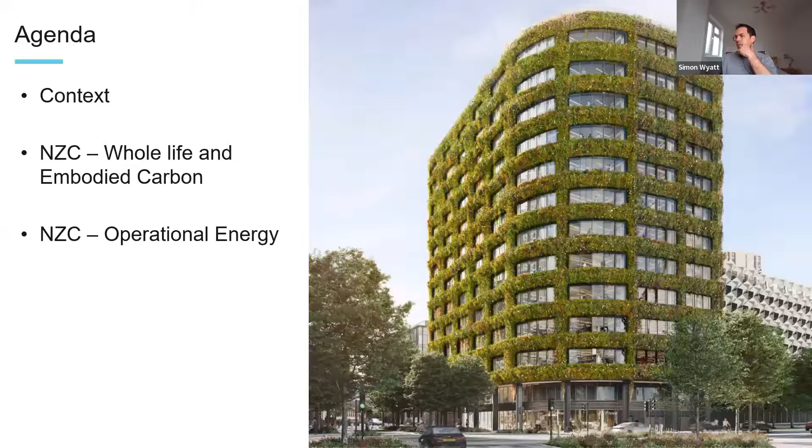So last year, we saw COP26 in Glasgow, where the world governments came together to review their targets. Obviously, after Paris, which was 6 years earlier in 2015, where the governments agreed to limit climate change to 2 degrees with an aspiration of reducing it to 1.5 degrees. Unfortunately, before the agreement, commitments were only around about 3 degrees. We saw some movement during COP26.

We saw commitments potentially going down as low as 2.1 degrees, but only policies and actions equating to roughly 2.7 degrees. So people are making a lot of commitments and noises, but they're not backing it up with full policy and action. So there's still quite a policy gap, which all global governments are looking at the moment to see if they can move us down towards that 2 degrees and then hopefully on towards 1.5 degrees.

So COP26 was aspirational, but didn't deliver as much as we hoped. And there's still a significant amount of work to do. And when they meet again later this year in Egypt, I believe, there's significantly more work to do in order to get down towards the targets we're looking at.

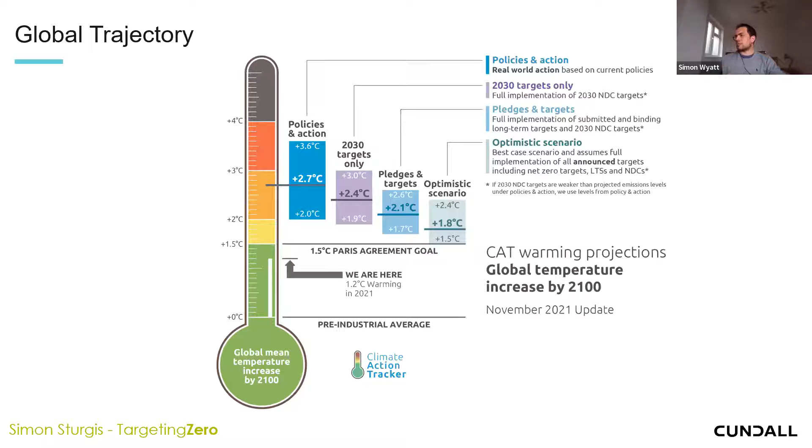What does this mean? Well, it means that we're still on a trajectory for well above 2 degrees, with a significant emissions gap down to 1.5 degrees globally. We need to take urgent action in order to meet that. The IPCC report, which came out a couple of months ago, was pretty damning, indicating that we need to take drastic action urgently to mitigate the worst effects of climate change going forward. And we need to take that action in the next 2 to 3 years in order to alleviate the worst effects.

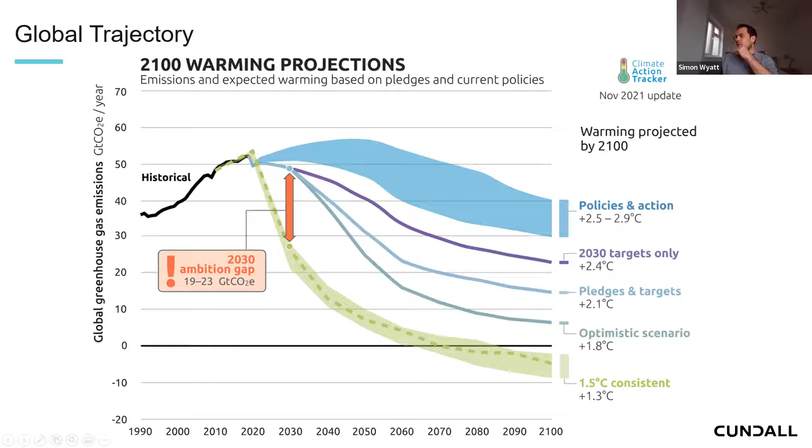What's the UK government doing? Well, the UK government is actually doing reasonably well in terms of commitments, but again, they're lacking policy and focus to deliver those commitments. So back in 2019, they amended the Climate Change Act to be net zero carbon by 2050, which was originally a target of 80% reduction. Now it's down to zero, which means there's no places to hide.

All industries need to decarbonise, both new buildings and existing buildings, and all other sectors of the economy need to move down to net zero carbon by 2050. This is a legally binding target and is fairly aspirational. The UK government was one of the first to do this.

Since then, they've actually brought in some interim targets, because it's not just good enough to be net zero carbon by 2050. If we only achieve it towards the end of the 2040s, we will have spent our carbon budget and be over 2 degrees. We need significant reductions, as I said earlier, before that.

So the UK government has tried to align their emission trajectory to a 1.5 degree trajectory. They're not quite there yet, but they're looking at 78% reduction by 2035 and a 68% reduction by 2030, which is what they committed to at COP. These are closely aligned to 1.5 degrees, but not fully aligned. I think there's only one country in the world which is fully aligned at the moment with the 1.5 degree trajectory. There's a dozen or so countries, including the UK, which are considered to be near, but not fully aligned.

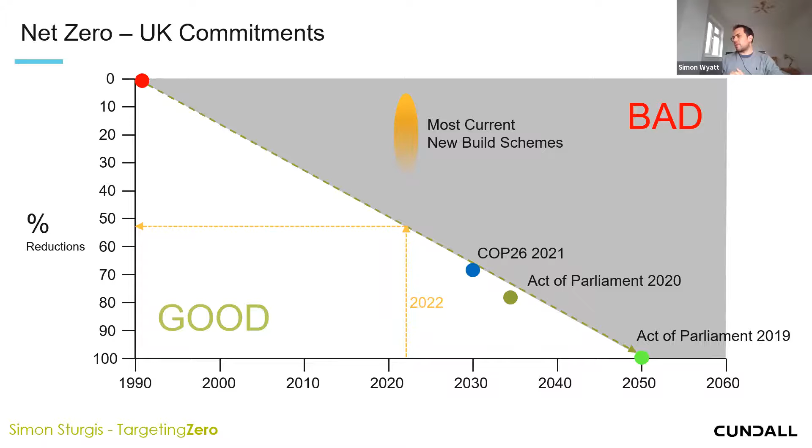Most new schemes built to regulations and standards are only achieving a 20 to 30% reduction over the 1990 baseline level. So we need significant action on new build, and we need significant action on retrofit and refurbishment as we go forward. And retrofit and refurbishment will become much more important in order to meet those targets as embodied carbon drives up the agenda.

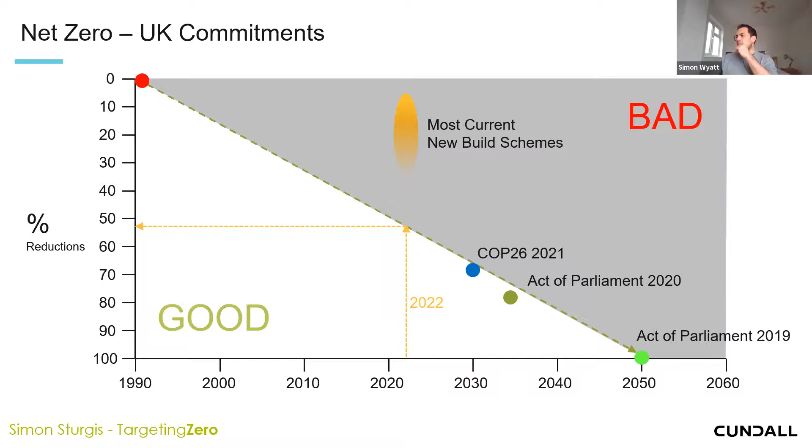So just taking a step back, what do we actually need to look at, and what do we actually report? When we're looking at carbon footprinting, we basically have to follow a standard process on an annual basis, which is calculating the carbon footprint, reducing that footprint, and if there's any emissions left, offsetting it. And what's really important is reporting that transparently so that everyone can see that everyone is doing it to the same standard and processes. Seems like a fairly straightforward process, but carbon emissions are a lot more complicated than that.

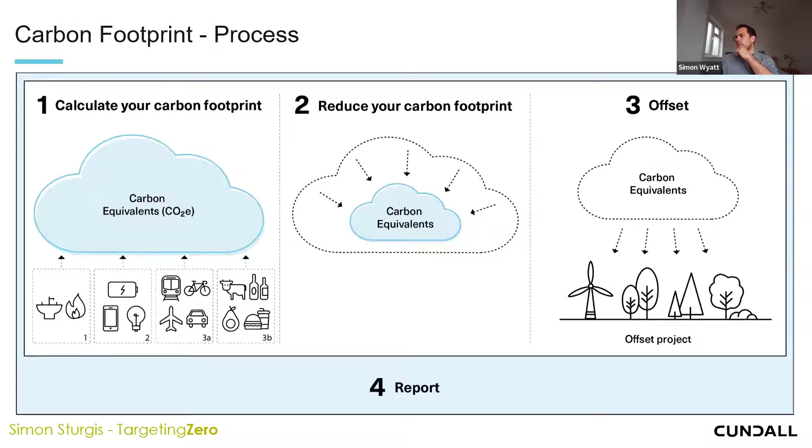When we talk about carbon emissions, we generally want to refer to the greenhouse gas protocols. The greenhouse gas protocols define all carbon emissions, all greenhouse gas emissions globally. They don't just cover carbon, they cover all greenhouse gases, and they're broken into 3 scopes. Scope 1 emissions are where you directly burn fossil fuels. So that's things like gas boilers in buildings, also vehicles and fleets of vehicles that are part of a business. Scope 2 emissions are indirect use of fossil fuels such as electricity, district heating, district cooling.

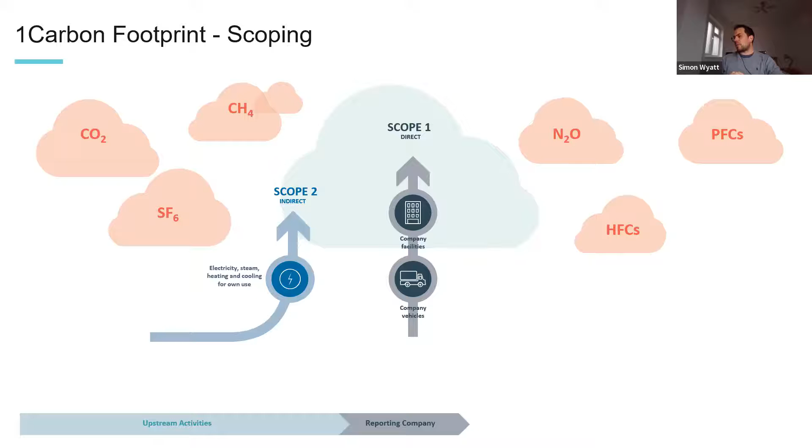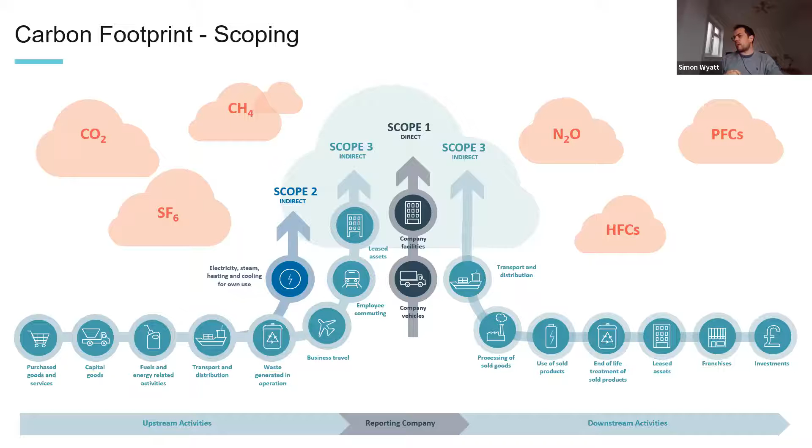Both of these can be fairly accurately reported and have been done for a number of years. You just take your gas and electricity bill, quantities of diesel, petrol invoices. As a company, those are fairly easy to report, and at building level, it's normally just your gas and electricity bill. But carbon emissions don't just stop there. We also have what are known as scope 3 emissions, which are indirect emissions, both up and downstream, which cover basically everything we touch that has a carbon footprint. So business travel, commuting, all goods and services we purchase, any transaction you do will have a carbon footprint, and that should be accounted for at corporate level.

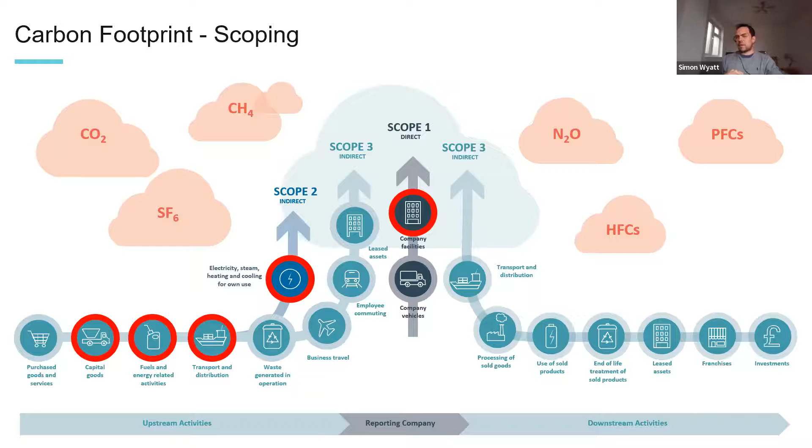When we look at buildings, we generally try and simplify this process. We very much focus on the scope 1 and 2 emissions, but we also look at scope 3 in terms of capital goods, so the materials we use to build buildings, transportation of materials to site, and also fuel and energy related activities. And a number of years ago, what we did in the built environment, and Simon was heavily involved in this, was to create something called the life cycle modules, which simplify all scope emissions for the built environment with a focus around scope 3 embodied carbon and whole life carbon. So I'll hand over to Simon now, who's going to take you through the definition of the life cycle modules and go in a bit more detail on embodied carbon and whole life carbon.

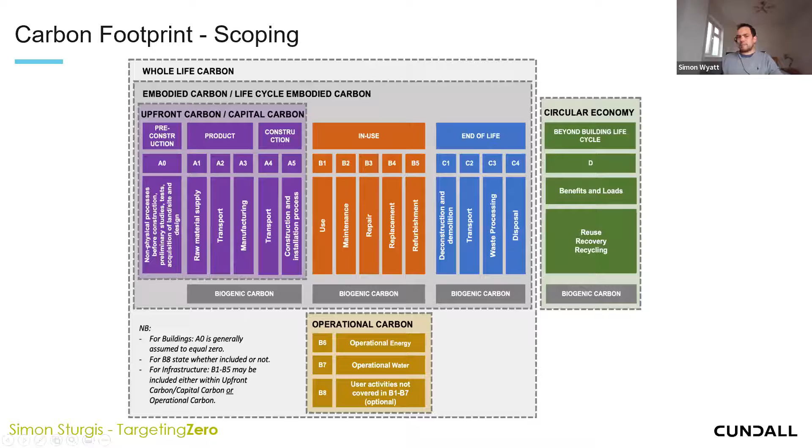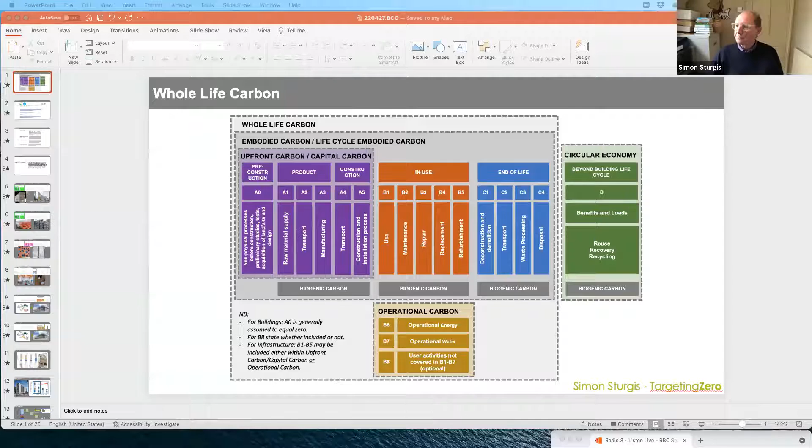Simon, you need to come out of the... Sorry, there you go. Okay, so yeah, we can see that now, Simon. Great. I hope that looks okay.

So thank you, Simon. So it's a bit of a double Simon like this. What I'm going to try and explain, without getting too complicated, is the structure of whole life carbon assessments. And you'll see in the different colors there, it's broken down into, in purple, you've got module A, which is about product sourcing principally and construction. Then in orange, you've got module B, which is to do with materials in use, emissions, maintenance, repair, replacement, and so on.

And below that, also obviously in use, is operational energy, operational water. And below that is user activities not covered by B1 to B7. So you've got the in use in the middle there, and then the end of life, which is demolition or deconstruction preferably. And all of those together, as you can see in the outer dotted box, represent whole life carbon. So all of that would be described as a whole life carbon assessment. So it's both operational emissions and embodied emissions from the material use.

And if you look at this smaller box, the second size box, if you like, which is embodied carbon or life cycle embodied carbon, everything in there, which is material orientated, is what is described as embodied carbon. So it includes not just the upfront carbon, which is the initial carbon expenditure from product sourcing and fabrication and so on, and construction, but also it includes in use and end of life. So that gives you your total embodied carbon over the life of a building.

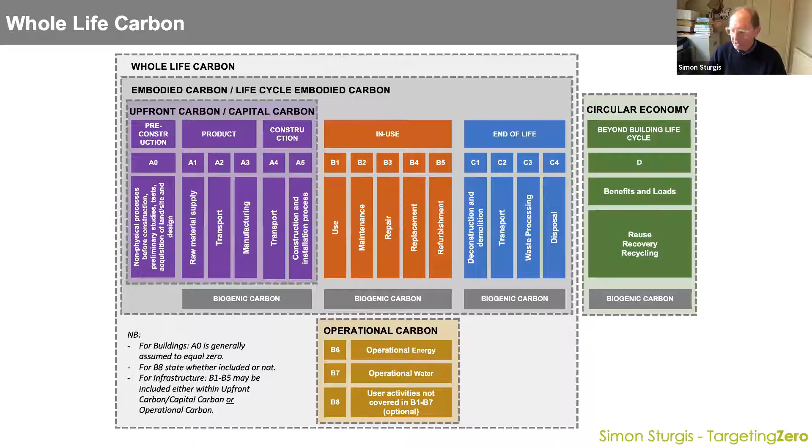And the other thing that's worth noting is that each of the maintenance, repair, replacement modules are effectively a mini version of the whole. So when you, for example, replace a cladding system or something, you're really doing the same thing as a new building, but in microcosm. So I'll just go on to something a bit more about definitions.

So this document that Simon mentioned is something that's been worked on by a cross-industry group. And you'll see at the moment there, it's just got Whole Life Carbon Network, LETI and RIBA, but we are just about to add in CIBSE, RICS, IStructE, UKGBC, and ICE, subject to approvals by their professional institutions. And what we're trying to do here is produce a consistent set of definitions for cross-industry use. An early version of this was produced and is available on the LETI website from last May. But this is being updated. And I'm just going to show you a couple of things.

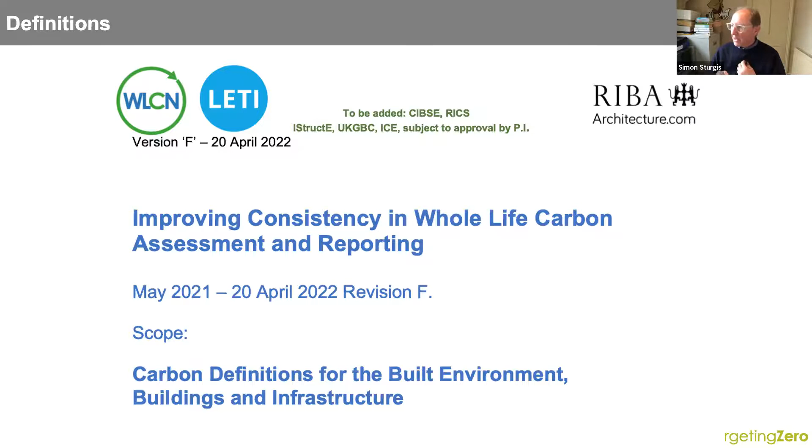And the reason for this is that a lot of different organizations produce their own definitions, which are all slightly conflicted. So what this is trying to do is produce a consistent set of definitions that align with that structure that I've just shown you in all the different colors. So, for example, whole life carbon, I won't go through these in detail, but it's describing what whole life carbon is.

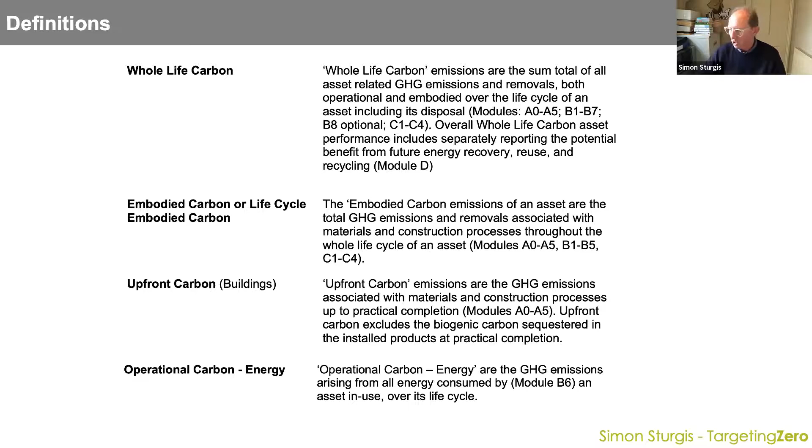And basically it's saying it's all of those modules as I've described. And then you've got embodied carbon, upfront carbon, which is the early stage, and then operational carbon, which Simon will talk about later. And then I think most importantly is net zero. So typically net zero has been thought of as reducing your in-use, your operational emissions down to zero. Well, in reality, what we're now saying is that net zero is everything, because it is then consistent with science-based targets, and it's consistent with the overall trajectory that Simon was talking about.

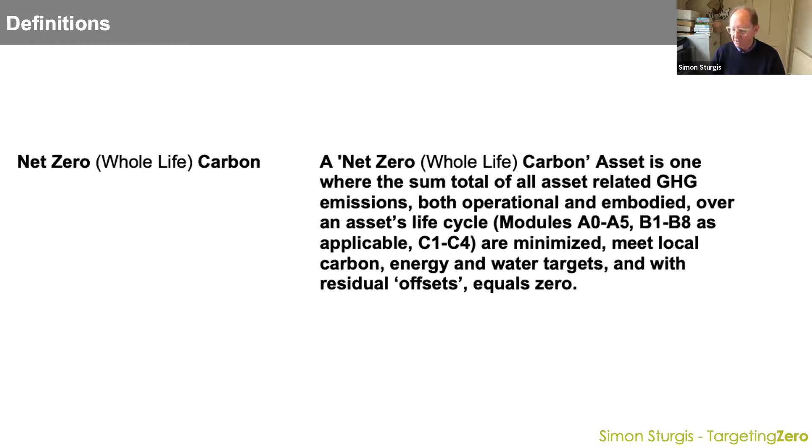So I'll just take you through each of these stages, just to give you a quick snapshot of the ways you might reduce. So these first stages, as I said, are the product and construction stage, module A. And on the left there, you've got a cross-section through the new Google headquarters under construction next to King's Cross. And what this is doing is reducing its carbon footprint by introducing things like intermediate timber floors and then timber cladding on the outside as well. And despite all of that, which you might think, well, what about the life expectancy and so on? But they're looking at least 100-year life cycle.

The building on the right, some of you might notice, is Triton Square. Number one, I think, is Triton Square in London. And that is actually a retrofit. So what has happened there is that the existing frame has been retained and various other elements have been retained, but it is fundamentally a retrofit in practice, but it feels and looks and operates like a new building. So that, of course, has a much lower footprint. Both of those are different ways of lowering your footprint.

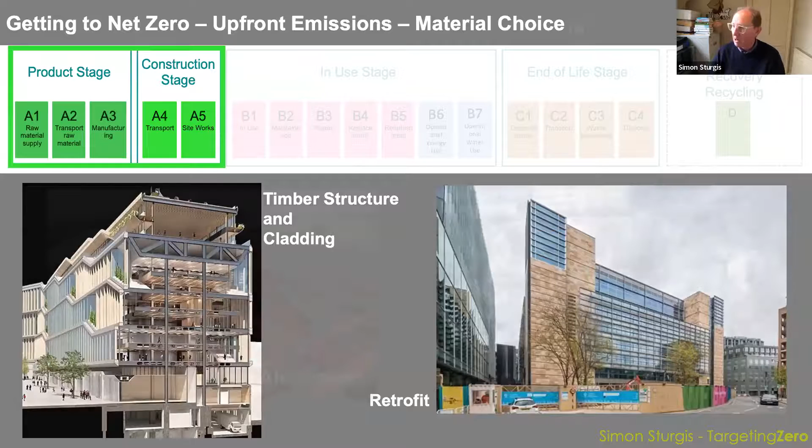Also important is something like, and I'm using aluminium as an example here, and this is not a hard and fast rule, but as a general principle, if you're using, say, anodizing, you need a consistent substrate of aluminium, which means you need new aluminium to ensure the color is consistent across your entire facade. Whereas if you use recycled aluminium, then you're going to need powder coating. So in other words, if you choose powder coating rather than anodizing, you're able to use recycled material. There are other issues, for example, like life expectancy and so on, to take into consideration.

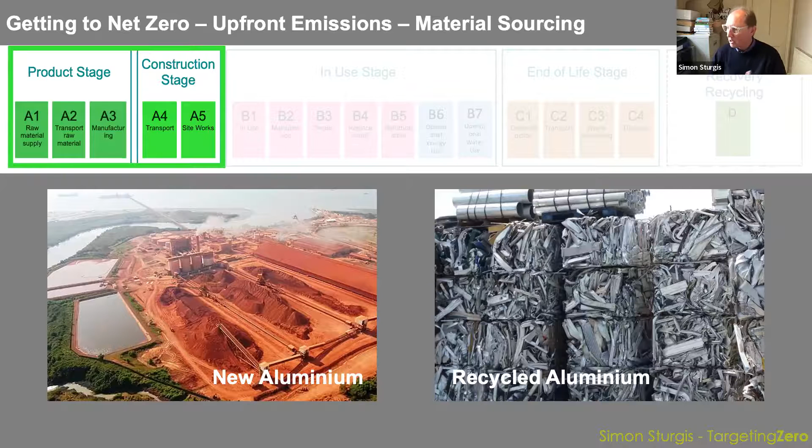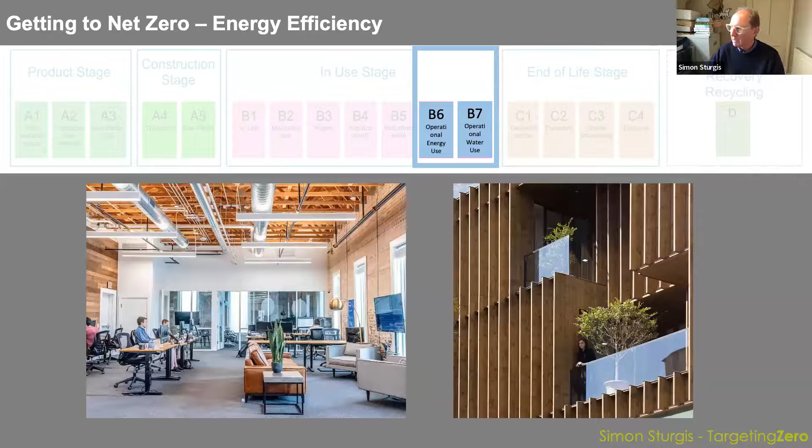So in use operational energy and water, this is really just making the point that obviously you can manage the amount of energy you use within a building by how you design the facade on the right there, and obviously how you deal with the temperature and so on inside, humidity and what have you, can all be managed by fabric, if you like, a fabric first type of approach.

Then end of life stage. So this is actually the building I was involved with; it belongs to Segro. And what we did was we actually dismantled the building and moved it about 2 miles to a new site, which is commercially much more attractive. So that's the photograph before, and that's also the photograph after, if you like. So module D, reuse, recovery, recycling.

Now, the interesting thing about that was that to do that, it was cheaper, it used less material, and it was quicker on site. And of course, this is a fairly typical 2-story industrial unit with mostly double height space, but with a 2-story office section at the back. And as I say, we were able to reuse something like 70% of that building in moving it. And of course, the costs, I think, were about 25% down.

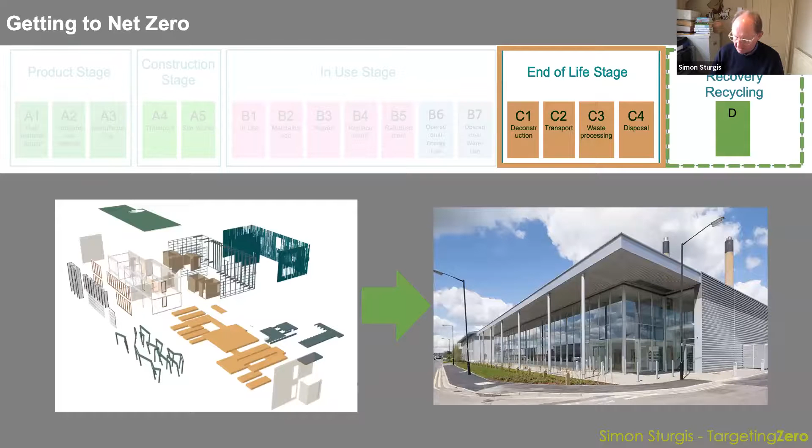So what about costs? So this again is the Google building. What we found with virtually every single tender is that the lowest carbon cost and the lowest tender price coincided in almost every case. So that was really quite encouraging.

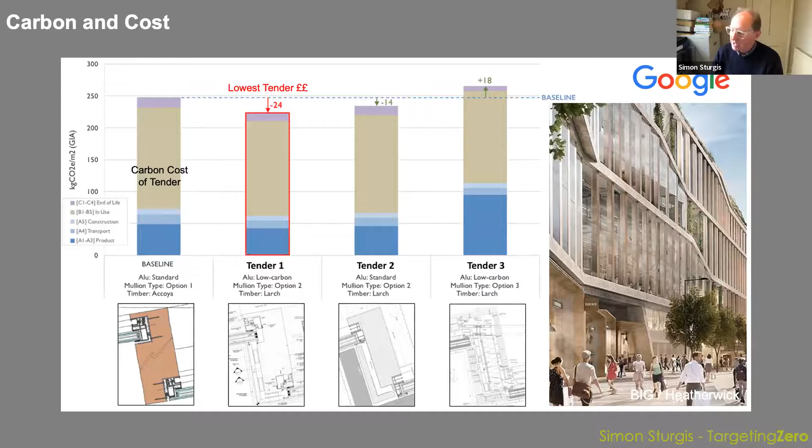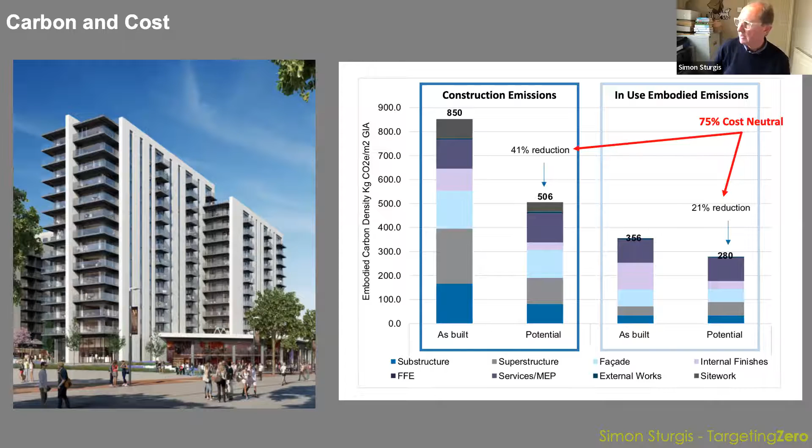This is actually a residential building, but the same basic principle. This was a Quintain project we were advising on, for example going from 850 down to 506 as the possible menu of options. And the Quantity Surveyor said that 75% of those reductions were certainly cost neutral, and the other 25% was worth tendering anyway.

So there's nothing difficult or weird about trying to get that level of reductions, and that would be compared to, say, 1990 levels. Obviously, the next 20 to 30% is more difficult, and you start having to do more innovation, or as Simon mentioned, starting to introduce a bit more retrofit. And then as we go forward towards 2035, of course, we need a greater level of innovation and so on. So the first bit is not that difficult and is achievable right now.

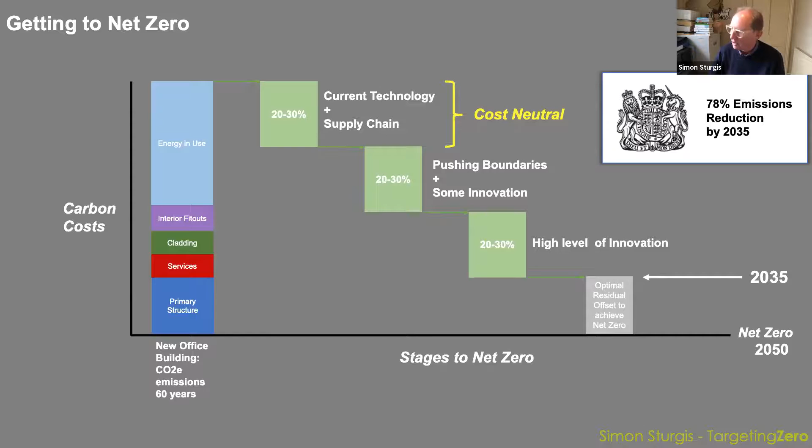And certainly with developers such as British Land, Landsec and others, we were achieving those kind of reductions without any problem. And certainly they weren't enthusiastic about spending extra money on carbon reduction, and no discredit to them on that.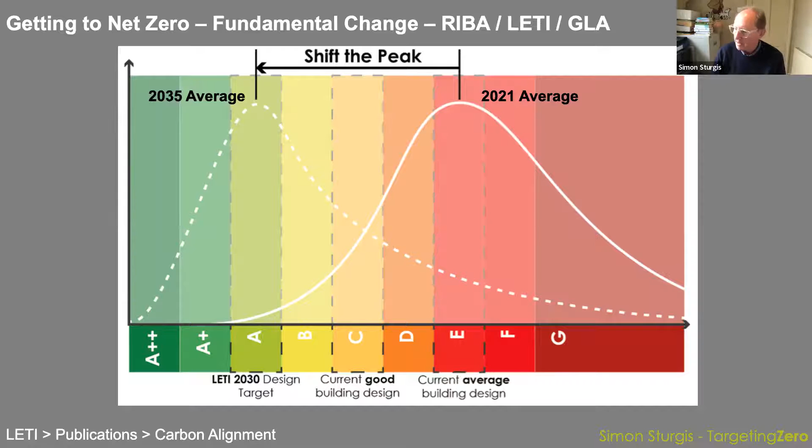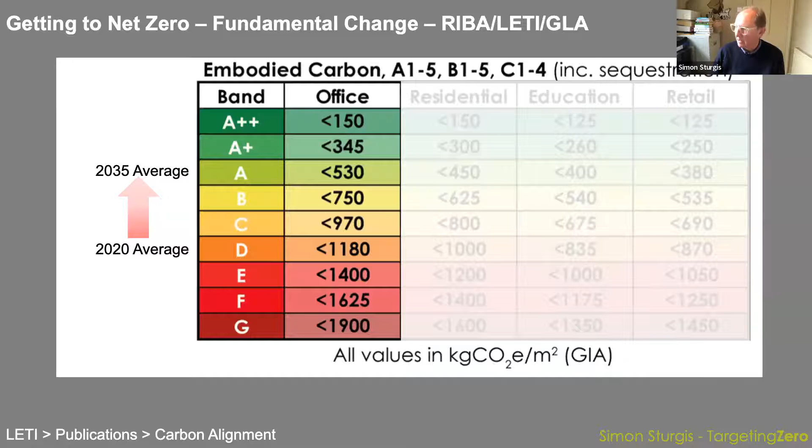And in terms of office, you can see in terms of numbers, if the average around 2020, 2021 is over 1,000 there, about 1180 or thereabouts, we need to be below half that by 2035. So that gives you some idea of the scale of change that needs to come in and achieve those sorts of reductions.

And this diagram here is a life cycle picture. So what you're looking at here is a graph where on the extreme left, PC at the bottom left there, you've got the construction emissions, and then each of those spikes, as you go from left to right, represents replacements and so on.

And you can see overlaid with that in blue are the sort of lease events, and then grading up in yellow would represent climate change. So the objective here is to try and align lease events, if you like, with the efficiency with which the building is managed and operated, so that instead of having, in this case, major changes that look like they need to happen just before a second lease event.

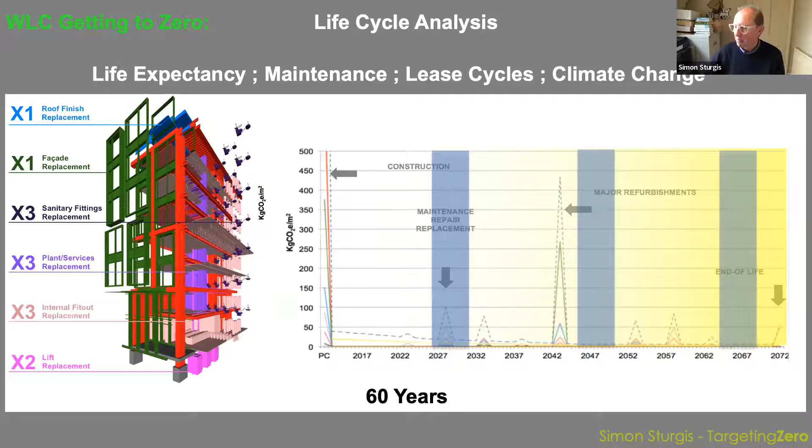This diagram here, this is actually a residential block, but the same sort of thing would apply to an office building, with the exception that the blue columns would be slightly higher. So what you're looking at here is a sort of aggregated map, every 5 years, of the carbon emissions of a project. On the left there, you've got construction emissions in dark green. And then at the bottom, you can just see a little emerging bit of operational energy in blue.

And then that's obviously aggregating up every 5 years. And then in pale green, you're starting to get the repair and maintenance emissions, which are also aggregating up. Obviously, the construction emissions stay static because you've built it at the outset, but it gives you an idea of how things change and why embodied emissions are important over the first half of a building's life particularly, and the construction emissions are particularly important.

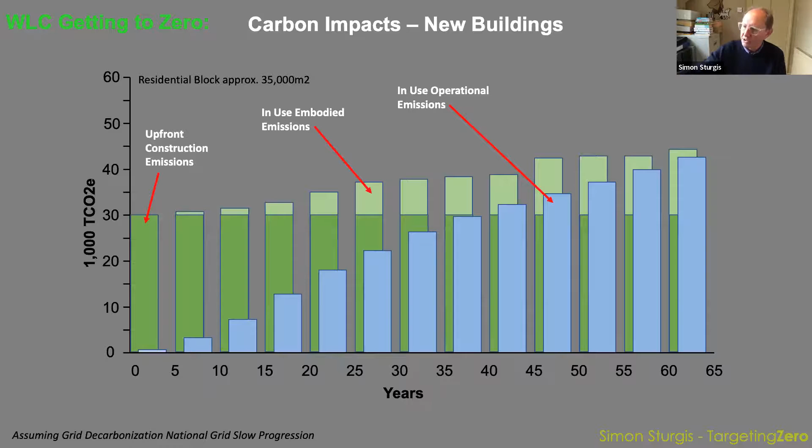So just a couple of points. These aren't office related, but they kind of give you an idea. One of the things about future-proofing a building is to talk about durability, adaptability, and flexibility. And you can see here a Victorian terrace house is a pretty standard example of that kind of thing.

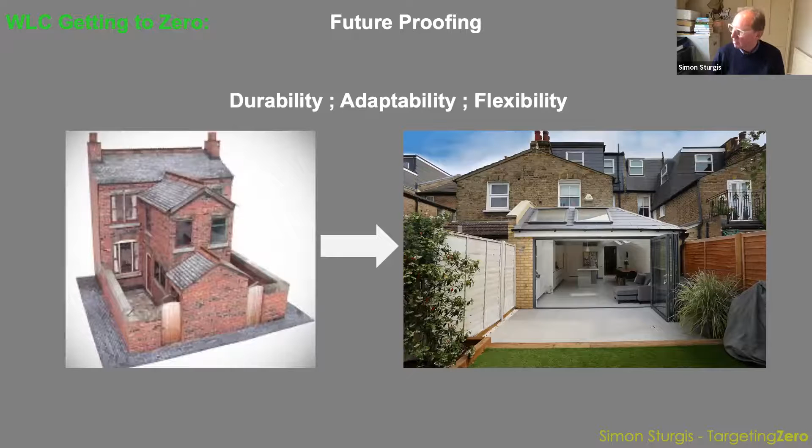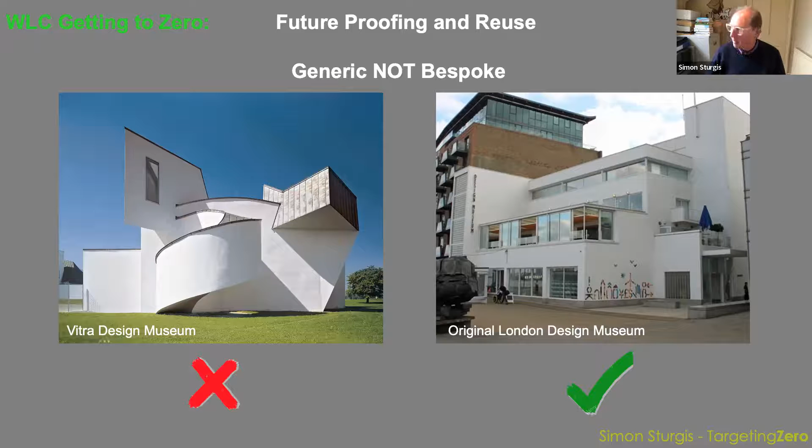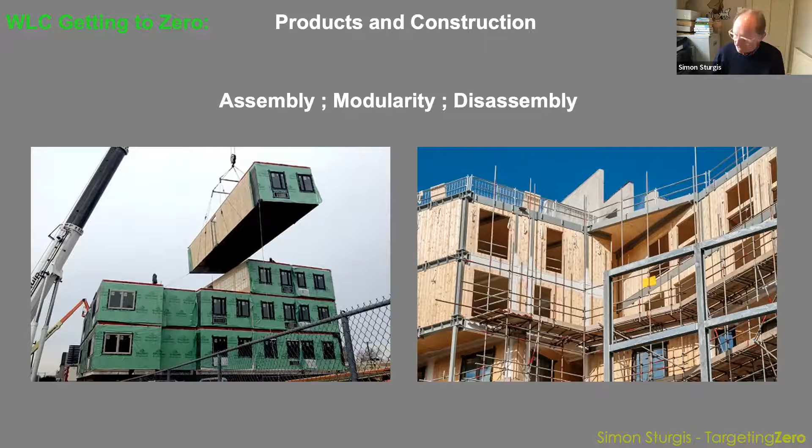And then here we've got materials, assembly, modularity, and disassembly, and how all those sorts of things can be optimized to ensure that there isn't future wastage. And of course, the advantages of assembling things in a factory mean that you've got tighter control over the conditions in which things are made.

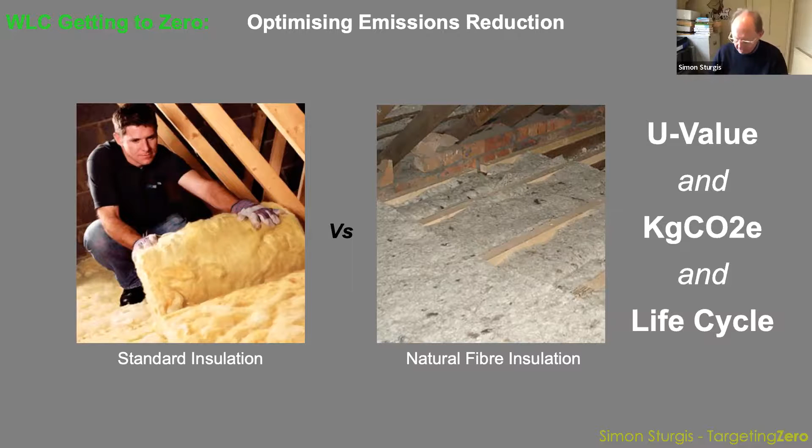This is a point really about U value. Typically when we think about insulation, we think about it as only providing a U value, in other words, an energy performance enhancement value. But what this is saying is that the material itself has a carbon cost. The one on the left is, I think, about 10 times the carbon footprint of the one on the right. But then you've got to think about life cycle. Will the one on the right last as long, and so on? So you need to balance out these things and think holistically about this.

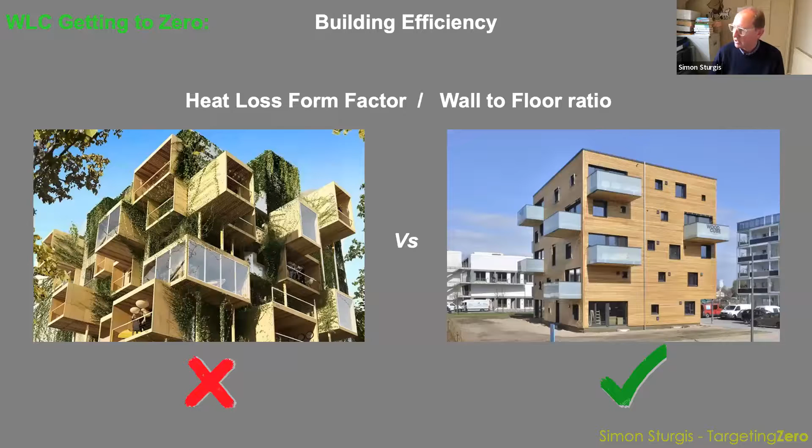This is a pretty simple example of shape, heat loss form factor, or wall to floor ratio. I think it's pretty self-evident that complicated shapes have all sorts of issues when it comes to operational and embodied emissions.

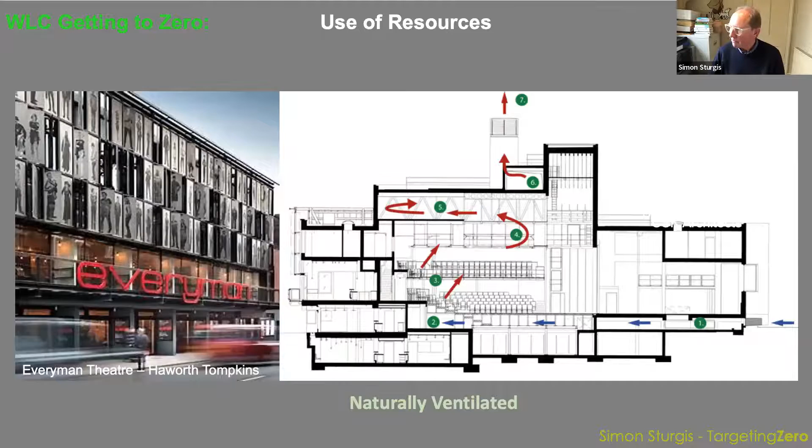So I thought I'd just run quickly through the business case, if you like, for doing whole life carbon assessments and really looking at this sort of thing holistically. One of the first ones is it is ultimately about improving resource efficiency.

And of course, that includes money. And so it is really part of, or should be part of, value engineering. You know, what is the carbon efficiency of the building? Are we using materials to their optimum? There's obviously life cycle issues, which is to do with future performance and future cash flow.

If you do, like that graph I showed you with the spikes on it, one of those, you can actually start to predict when things are likely to fail. Does that all make sense? And you can put a cash flow to it. Certainly with the Google building, they were interested in putting a cash flow to the whole of that. And so you get an idea of the total cost of ownership as opposed to just the construction cost.

Life cycle is also about durability, adaptability, and of course that is starting to come into due diligence. With a number of developers I've spoken to, when they purchase a recently built asset, they will start to be asking for a whole life cycle, whole life carbon assessment to understand how the building is expected to perform going forward. There's also potential insurance benefits. You can demonstrate that there is durability associated with the building, so it's less likely to fail, and that can certainly have benefits.

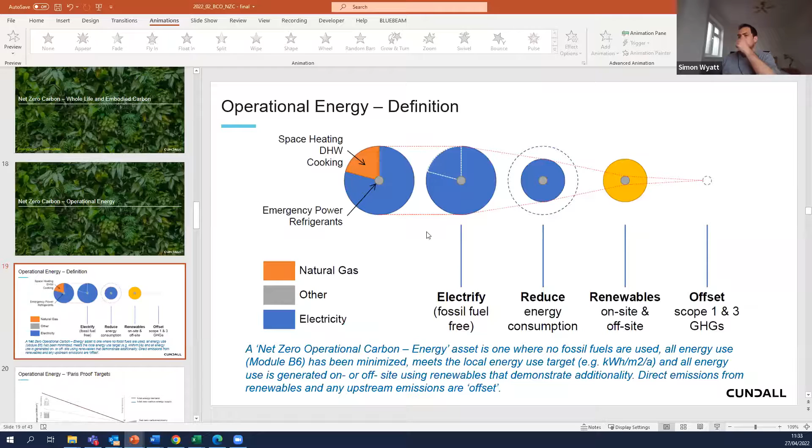Yes, apologies. So as I was saying, the main focus is to remove fossil fuels. For new buildings, that's fairly easy. It's going to things like heat pumps for heating, CO2 heat pumps for domestic hot water, induction hobs for cooking. Then it's about reducing your electrical consumption by energy efficiency, a fabric first approach. And then once you've reduced it as low as possible, it's providing as much energy on site as possible.

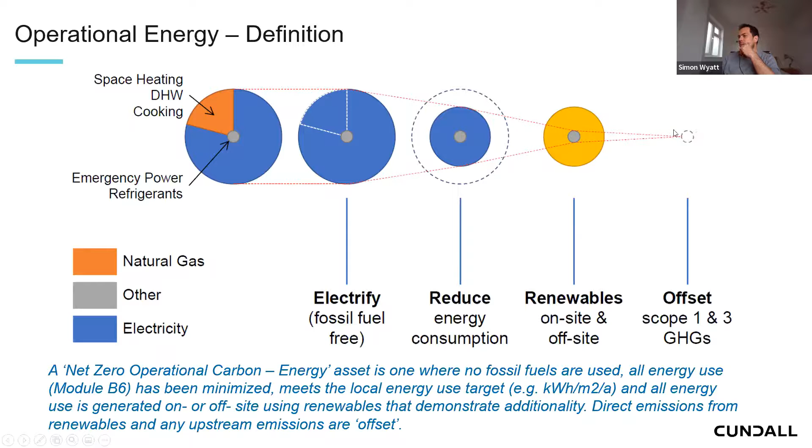And where that's not possible, things like city centre locations, then it's procuring green energy. There'll always be some scope 1 emissions left, generally associated with things like refrigerant and emergency power, and they will need to be offset to move down to zero. So one of the key requirements, as I said, was to meet intensity targets.

At the moment, the industry has been developing a raft of carbon intensity targets, operational energy intensity targets, like the embodied carbon ones. And the way that they've done this is twofold. One is to produce what are known as Paris-proof targets, which is looking at current consumption rates and the level of reduction required, whether that is practical, but saying where we need to achieve. And then there's a bottom-up approach, which is looking at what is theoretically practical, and both are getting to the same level.

But if you generally think about the UK going to all electric, we're going to be putting all of our heating onto electric, all of our cars onto electric. There's going to be a significant increase in demand. And in order to move to a net zero carbon economy, we must produce all of that electricity from renewables. And there's two ways we're going to do that as a country. One is to increase the amount of renewables, which we've been doing very well.

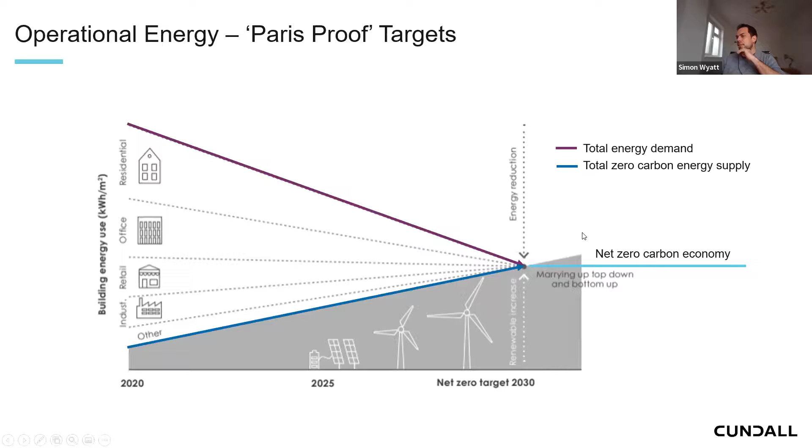I think last week, 85% of our energy came from wind and hydro and solar, and only 15% generally from coal. So we're moving in the right direction, and there's plans to put more capacity onto the grid as we go forward. But there's only so much capacity we have. What we need to do is at the same time reduce the amount of energy we use from all sectors. And that reduction roughly equates to about a 60% reduction in energy usage in order to meet all of our energy from renewable sources.

So what the built environment has done is it's set some targets. LETI, UK GBC, and other institutes are setting intensity targets for buildings. So you can see here for the office sector that a typical office building in the UK will use around 300 kilowatt hours, with the best practice 25% being just below 200. In order to be Paris-proof aligned, we want to be down at 70 kilowatt hours per metre squared. And what the UK Green Building Council has done is it's produced a step trajectory. So basically, every 5 years, they've ratcheted down these targets as we go forward.

They've given targets for a whole building, looking at all the metered electricity usage within that building, but then broken that down to base building and tenant energy consumption. Base building would be things like the ventilation, the heating, the cooling, the landlord lighting, whereas the tenant energy consumption would be the tenant lighting and small power consumptions. There's separate targets because the design team will very much focus on the base build because that's what they can affect, but then work with behavior change and tenant engagement to reduce the tenancy.

And as of last year, there was a rating system launched called NABERS, which has come over from Australia, which looks at the base building and can certify it to a star level based on its operational performance. What's really important to understand about NABERS is it is an operational standard. So you can do design calculations and predictions to predict a rating, but what really matters is that in-use performance. We're not looking at predictions and calculations, we're looking at actual meter readings to see how the buildings are performing in use, which is something we haven't really done in the UK.

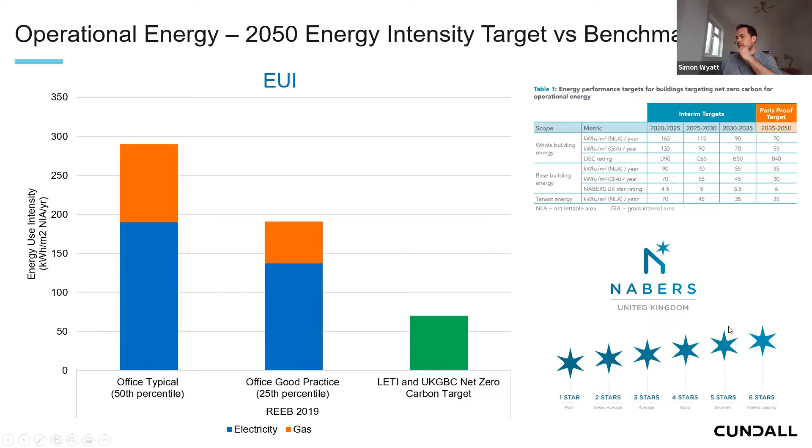At the moment, a lot of landlords are looking at their portfolios and they're generally only achieving 1 or 2 star, whereas the new buildings that they're designing, they're aiming for the 5 or 6 star, but that's a significant step change from where we have been in the UK for the last decade or so. And what we're having to do in order to get to that level of reduction is really at the design stage, look at detailed analysis to predict or estimate the operational energy consumption. And there are a number of methodologies for doing so.

In simple buildings like dwellings or basic offices which have minimal HVAC systems, the Passivhaus tool is a very proven technology for predicting operational energy consumption and achieving it in use. For more complex buildings which aren't heat-led, CIBSE TM54 is a good tool for predicting operational energy. But the main one we're seeing in the office sector at the moment is Design for Performance, which is doing detailed HVAC modeling of all systems within a building, using actual performance profiles of the building, looking at every single hour of the year, how plant operates and works going forward.

What it's not is it's not looking at the building regulations, Part L calculations or EPC calculations. They're not estimates of energy consumption. They're looking at energy efficiency only. So they're looking at how efficient a light fitting is, not how long you use the light fitting or how many light fittings you have.

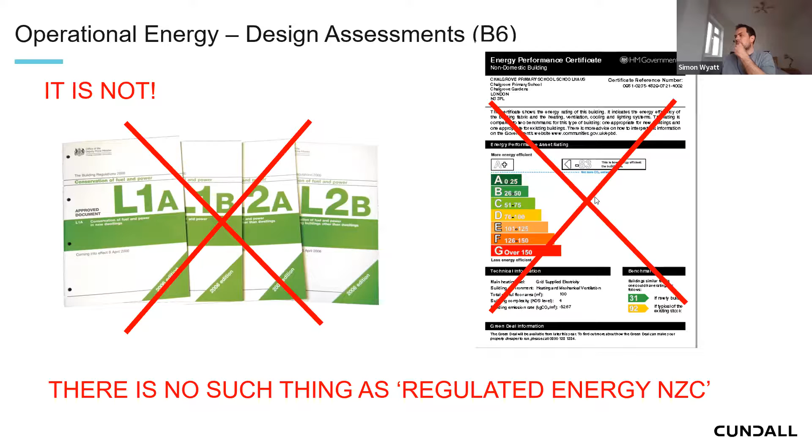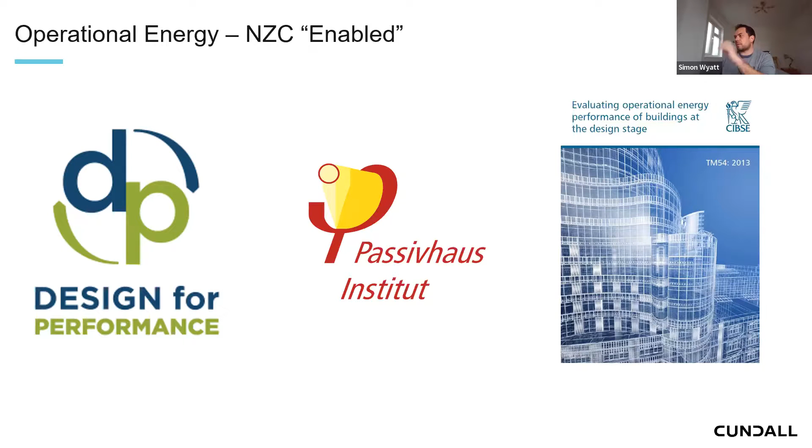And it only looks at a certain percentage of the energy. It only looks at what's known as regulated loads. So it only looks at things like heating, cooling, ventilation. It doesn't look at things like plug-in process loads, small power, lifts. So it only accounts for generally about 50% of the energy of a building, and it doesn't model it with the actual operational performance. So we need to be using Design for Performance, Passivhaus or CIBSE TM54 to do those predictions, to have any hope of actually achieving those performances in use.

What's interesting though about operational energy compared to upfront embodied carbon is the upfront embodied carbon, as Simon showed, is spent on practical completion. So you build the building, it's a one-off carbon assessment. It's the biggest carbon impact of that building, but it's generally built and then forgotten about. Whereas the operational energy is reported on a yearly basis. And obviously, if we're working to a trajectory or stepped agreement, then that will need annual performance improvements.

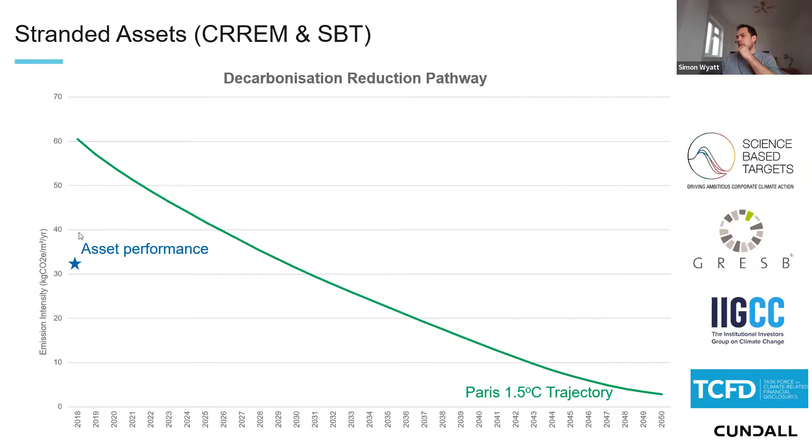So what's been released is something called CRREM, which has come from the European investment banks, and science-based targets, which are corporate targets for reducing energy consumption. And they've set out some targets for assets, existing assets, and obviously any new building that's built, as soon as it becomes operational, becomes an existing asset. And with an existing asset, you can plot the performance of that asset against the Paris proof 1.5 degree trajectory. And you can see here that this asset is below the green line and is therefore aligned to the Paris Agreement and is performing well.

But if it doesn't do any retrofit or refurbishment works as we go forward in time, its performance will be the same and the target will reduce. And it will become what is known as stranded, which basically means it's no longer aligned to the Paris Agreement and might be subject to financial implications in terms of being able to sell the asset, let the asset, and also regulatory requirements as the UK government tries to hit its 2050 targets.

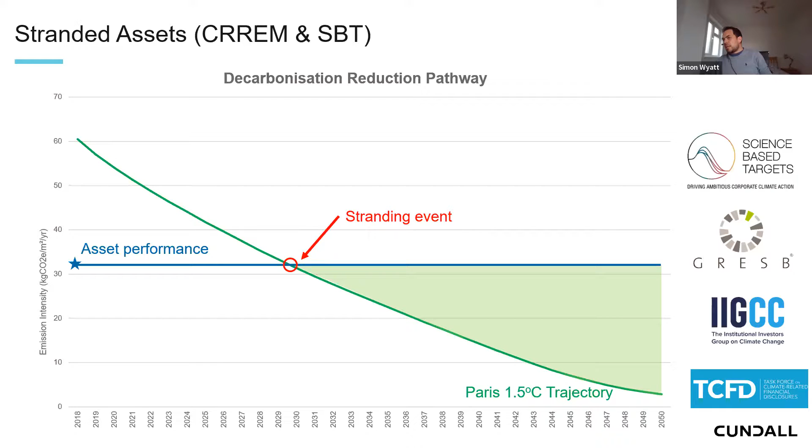So if a building is being built to the UK GBC step trajectories, which we showed earlier, then it's not aligned to the Paris Agreement, it's an interim step, then it will eventually strand. So it might be net zero carbon on day one, but after kind of 6 to 7 years, it will become a stranded asset, just the same as any existing building, unless retrofit works are undertaken. So what a lot of existing portfolios and a lot of existing office buildings are doing at the moment is looking at their current performance, looking at interventions that can be done to move that stranding date out in order to avoid that stranding event.

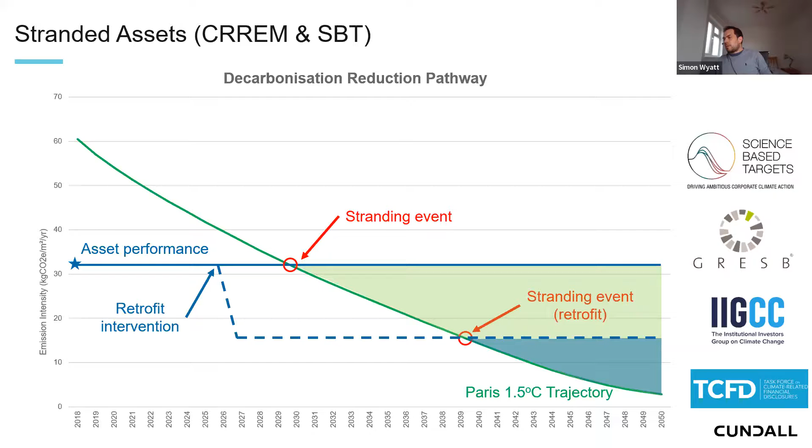Why is this important? Well, when we're looking at new buildings, there's quite a lot of discussion around the cost of net zero carbon. There's been a number of reports, including by the UK GBC, indicating kind of a 5 to 20% uplift for net zero carbon. And if you think about a typical building, if you're building a building and you have a cost, and then there's the cost of getting it to align with the Paris Agreement, that might be kind of 5 or 10%. You can spend that at day one, but if you don't spend that at day one, that building will still need to be net zero carbon in the future.

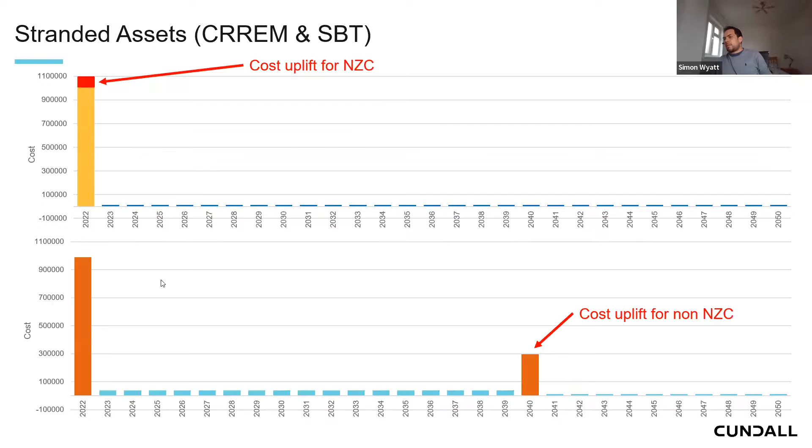So if you're planning on selling that asset, you might think that's fine, but investors like Aviva, Legal and General, will be doing technical due diligence on any building they're acquiring at the moment to look at what the cost of moving that to net zero carbon will be, to look at the cost appraisal. So you either spend it now or we're going to have to spend it later. And obviously the cost of recladding or doing significant works to a building is going to be much more at year 10 than it would be in today's market. So if we're looking at whole life carbon, we should also be looking at whole life costing to understand the actual cost of going to net zero carbon and when those interventions should be done.

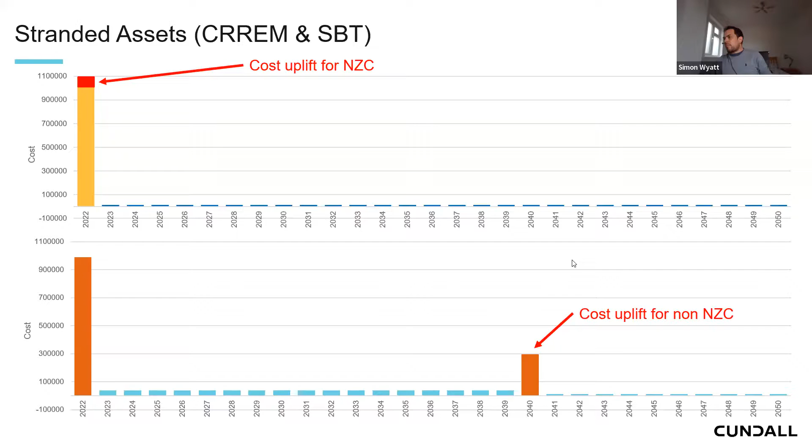And it generally indicates that it's generally much more expensive to work to minimum standards and then try and uplift it at later stages. And what most clients are looking at the moment is making sure that they get a fabric first approach, because if you're not hitting net zero carbon on day one, what you definitely don't want to do is have to go back and do significant works to the fabric.

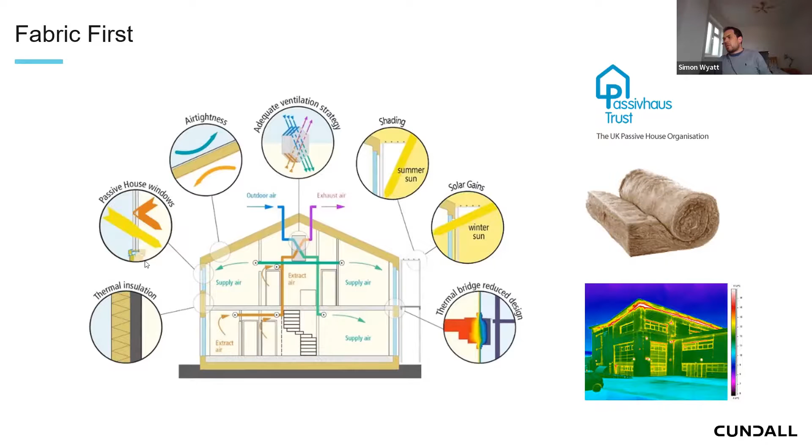If you're just shy of the net zero carbon Paris proof target, you can do things to your on-floor plant, you can change your lighting, you can improve your ICT. They're things which are done on a 3, 5 and 10-year cycle, whereas what you don't want to do is have to upgrade the fabric after 10 years on a new building or even 20 years. What we want to do is make sure that fabric is correct from the beginning and potentially spend a little bit extra there to safeguard and future-proof the building against upcoming standard requirements.

Again, as I said, it's not just new buildings. I've got a couple of case studies. So this is what a lot of landlords are doing at the moment. They're going in and doing reviews of their existing buildings. And when we do a review of the existing buildings, we break it down into elemental steps. So we look at things like passive design, operational energy, eliminating fossil fuels, renewable energy, a little bit around the upfront and whole life carbon, and score the performance of an asset from green to red and try and move everything over to the green by improving the individual elements of the building fabric, the systems, removing fossil fuels, as we've said earlier, moving to heat pumps, induction hobs.

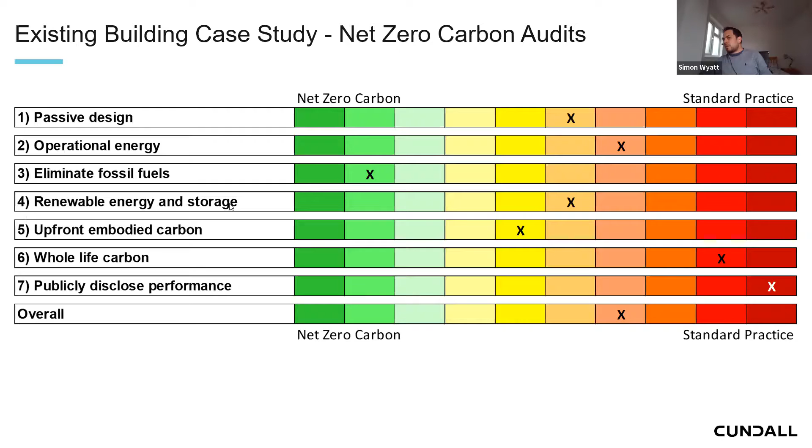So a lot of buildings at the moment might be at over 220 kilowatt hours, and they're aiming to get down to the LETI target of 55. And in order to do that, they need to produce a pathway looking at introducing things like heat pumps, improving fabric, looking at natural ventilation, optimizing plant, but also a significant focus on behavior change in the occupants. As I said, they can make up over 50% of the energy. So in order to get down to the lower levels, we need to change the behavior of the occupiers, put occupier behavior change into the leases and requirements, and move that operational energy performance.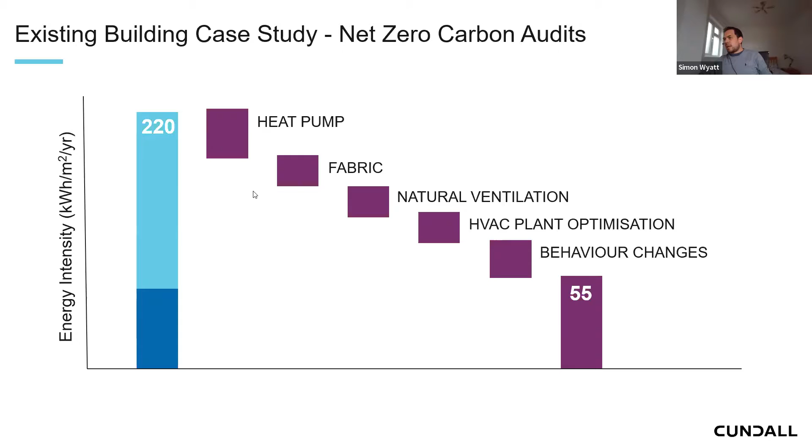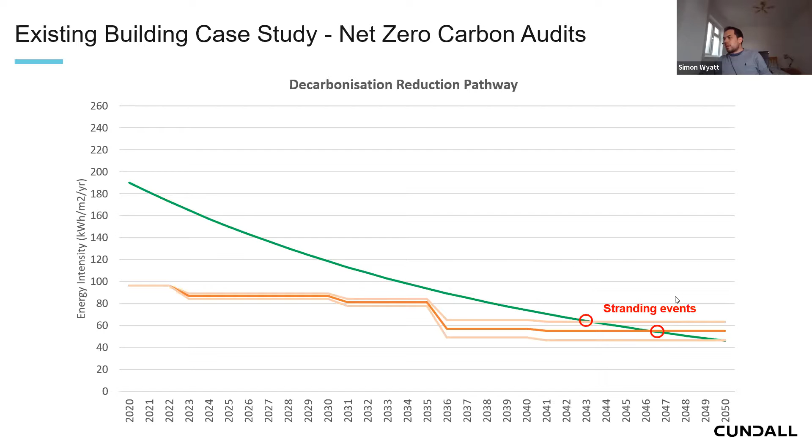And with existing assets, it's not as simple as doing this in one hit. What we need to do is phase that into a program over time, depending on sitting tenants, when you get spaces back, when you have planned plant maintenance and refurbishment. And then again, we can plot that against those trajectories so we can have the current performance and look at those individual interventions and what that will do to our stranding points. And because it's not an exact science, there will be some range and tolerance with the individual measures going forward. And as I said, this needs to be programmed in over the life of the building.

And if you've just signed a tenant to a new building for a 20-year lease, it means that you're probably not going to be able to get into that space for 20 years, and you're going to struggle to make that building net zero carbon before 2030. You might even struggle to get it to net zero carbon in operation by 2040 if you've only just taken tenants with a long lease.

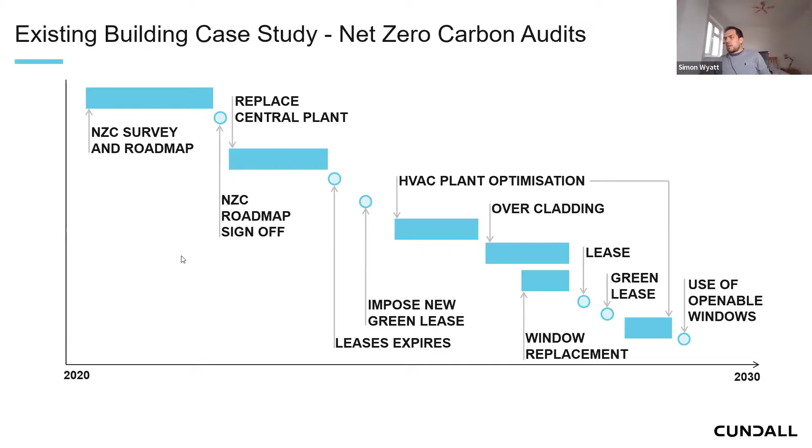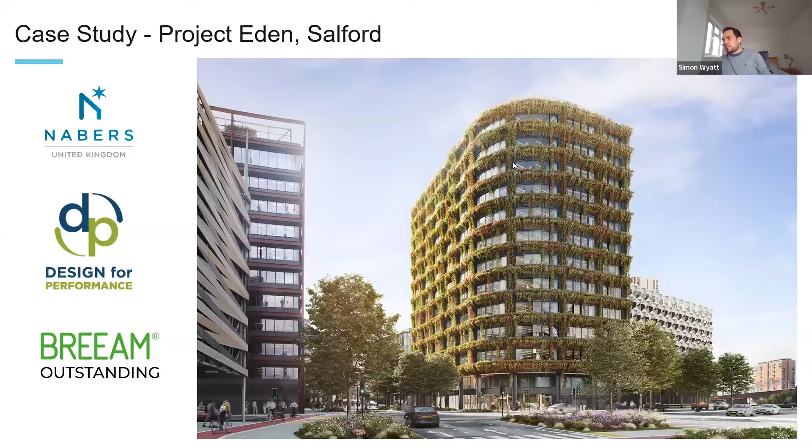So in terms of new buildings, this is a building I'm working on in Manchester, which is in Salford. It's called Eden, and it's looking to be BREEAM outstanding. It's doing design for performance with the aspiration of becoming NABERS 5.5 star, which would be the joint highest rated NABERS building in the country if it achieves that level. As I said, NABERS looks at just the base building consumption. So it looks at the whole building HVAC systems, lifts, common area lighting and power, and hot water. What it doesn't cover is the occupier lighting and small power. Again, we need to add that in when we're looking at whole buildings and understand that and have a route to net zero carbon for that.

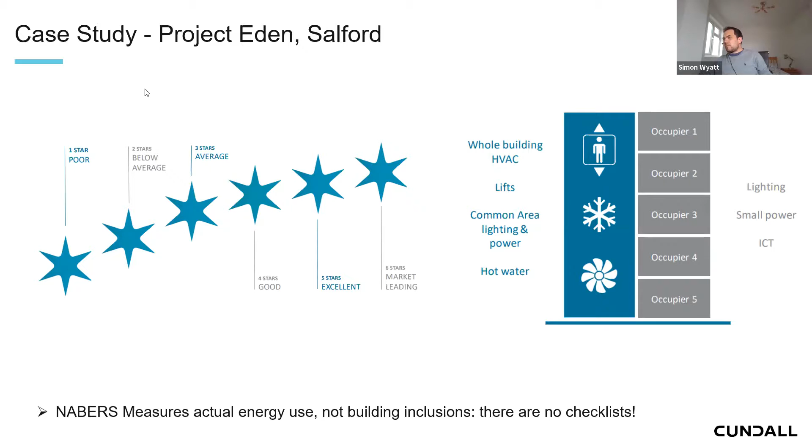But as a design team, the only thing that we can be certain on or have a large amount of control over will be the base building systems. So as I said, the A3 is aiming for the 2035 step. So it's not fully Paris aligned. There are no office buildings in the UK at the moment that I'm aware of that are actually achieving that 6-star NABERS or the Paris aligned 55. Most of the best practice are generally at that 5-star and significantly above the LETI UK GBC Paris proof target. Again, aiming for that base build is what we're looking at the moment.

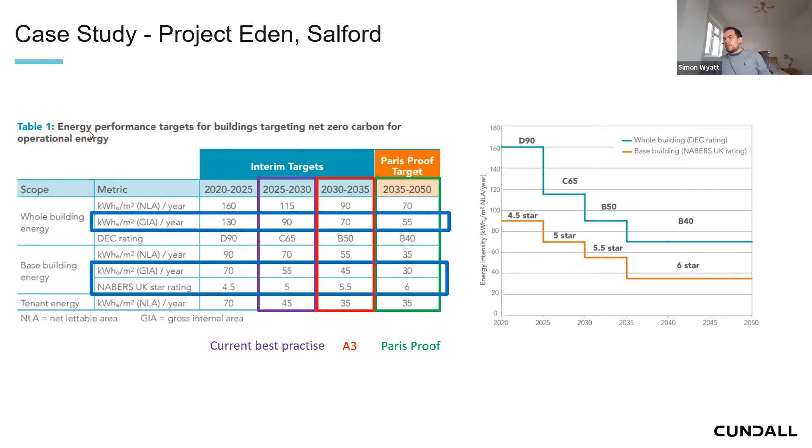So in terms of the design of that building, the main focus has been on the fabric first. So it's got really good air tightness and U values. It's reduced the glazing down to less than 40% ratio, 60% solid, with a high performing facade system. All the insulation is pretty much to passive house standard. And as I said, the air tightness is down to 2 compared to building regulations 10.

It's combustion free, so it's an all electric building using heat pumps to do the heating, with CO2 heat pumps providing high efficiency hot water. And it's also relaxed set points, so we don't have simultaneous heating and cooling. We're heating only to 20, cooling down to 25, and also looking at significantly reduced internal loads, much smaller equipment operating more efficiently, looking at the efficiency of every piece of equipment in the building.

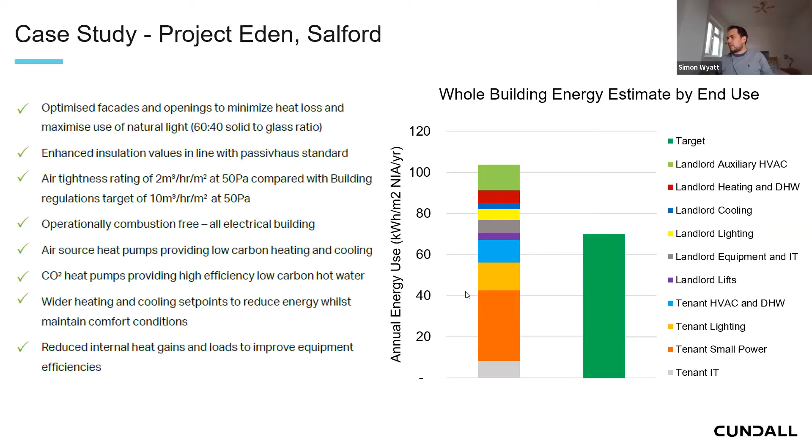And as you can see, it's still above the Paris proof target, but it's getting closer. And a large amount of that is down to tenant energy consumption if we look at the entire building. Whereas if we just look at the split, the UK GBC target is 35 for the landlord, 35 for the tenant. And we can see that the landlord systems are coming in close to that Paris aligned target, just over it, whereas we're expecting the tenants to be significantly above that.

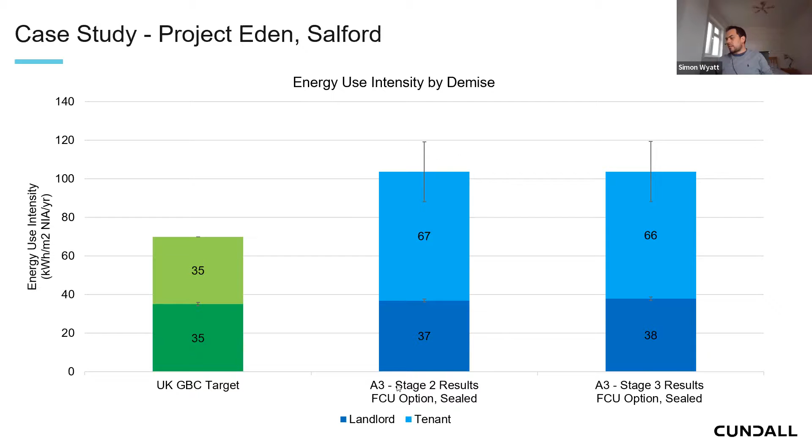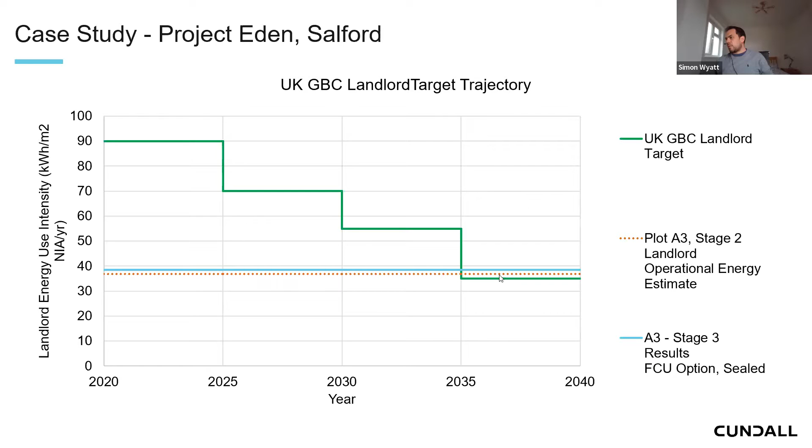So what we've done going forward, and this is what we recommend for all buildings, is it will be net zero carbon up until 2035, and then it will be stranded like any other asset. So we've put a pathway in how we reduce it from the current standard to the final steps, which will be minor plant replacement, and then how we can work with tenants to reduce their 66 down to the 35 over the next 10 years with tenant behavior requirements and leasing requirements.

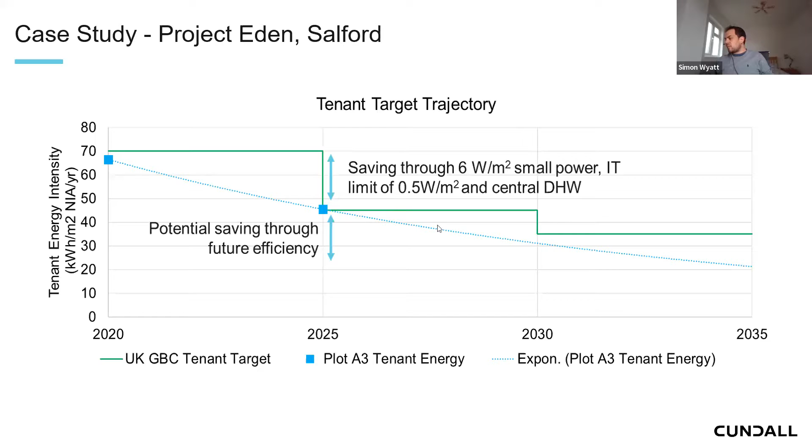Okay, so that's the end of the presentation. Do we have any questions? If you've got any questions, write them in the chat. There's a couple already come in, so I'll read those out and we'll go from there.

Simon, this one's aimed at you, which is to do with 22 Bishopsgate, which was one of the examples you showed, which was showing a significant improvement over the LETI benchmark target, but has a facade which needs replacing fairly regularly. So he's asking, is that greenwash? Well, my suspicion is that 591 figure is for upfront emissions only. So it's almost certainly carefully left out the replacements of that facade and indeed anything else.

So whether that's true or not, and it looks extraordinarily low anyway, but assuming it's true, then I think what they've done is obviously only used part of the story. This is something that I have discussed with LETI, because in a number of cases, people are selectively using reporting and how they do assessments to produce the best possible looking outcome, but it's actually not the whole story. And I guess that's what's happened here.

Yeah, and to be honest, with the LETI consistency project, with now targets for both the upfront and whole life carbon, if you're scoring well on one and not scoring well on the other, you're going to be found out. So you need to be looking at both. A1 to A5 is important now because we're in the climate emergency, but you still need to be looking at the full A to D modules and achieving a good score against the whole life carbon targets.